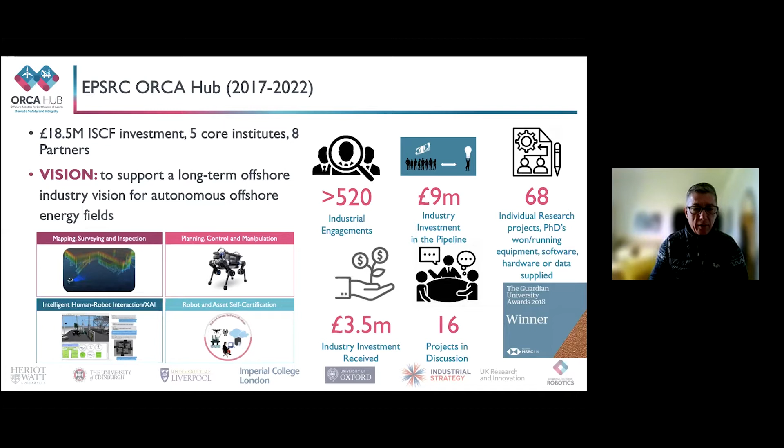The first work package was about mapping, surveying, and inspection, and we looked at 3 domains. The first domain is subsea. In this domain, we've created a new mobile platform that can be integrated into any underwater vehicle, including a stereo camera system, an acoustic DVL, and a gyroscope, enabling us to navigate around structures in poor visibility and build 3D maps of the structure. This is an example of the vehicle working in Blythe, where visibility was very poor.

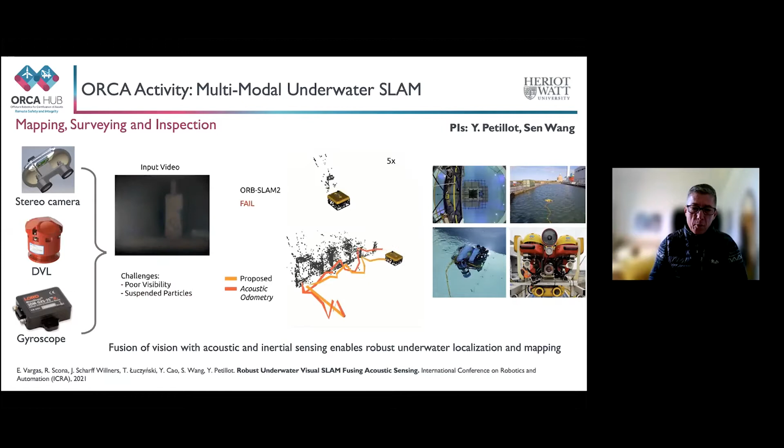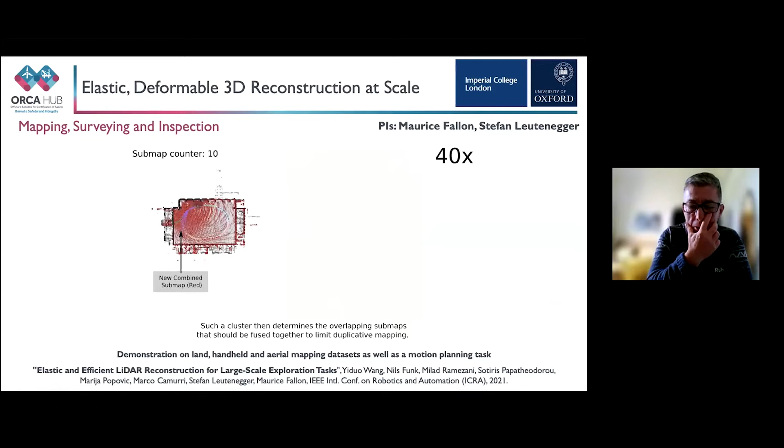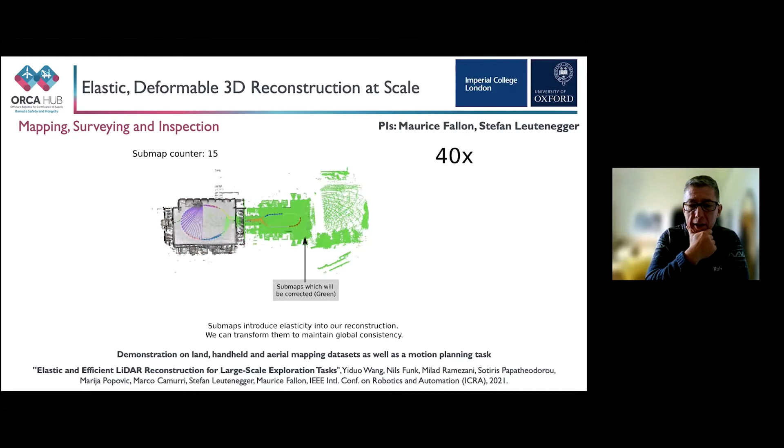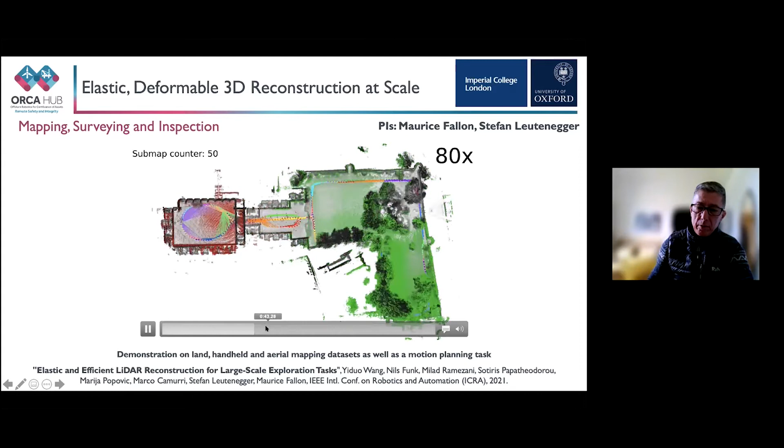We have done similar things in the air and land environments. This work was led by Imperial College and Oxford University. They have developed a payload that can be mounted on any vehicle, enabling effective mapping of the environment. This is an example in Oxford where a ground vehicle is mapping the area, and here's an example of an aerial vehicle mapping an area outside the campus.

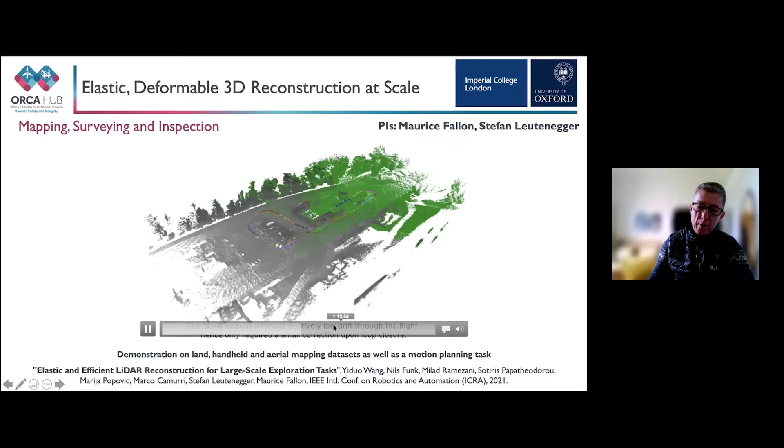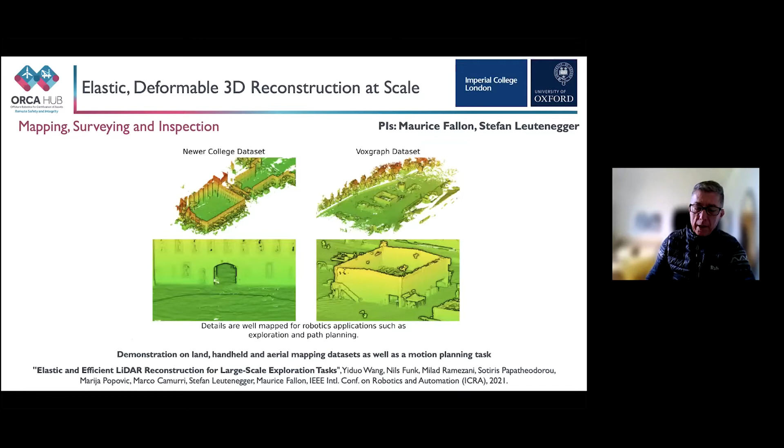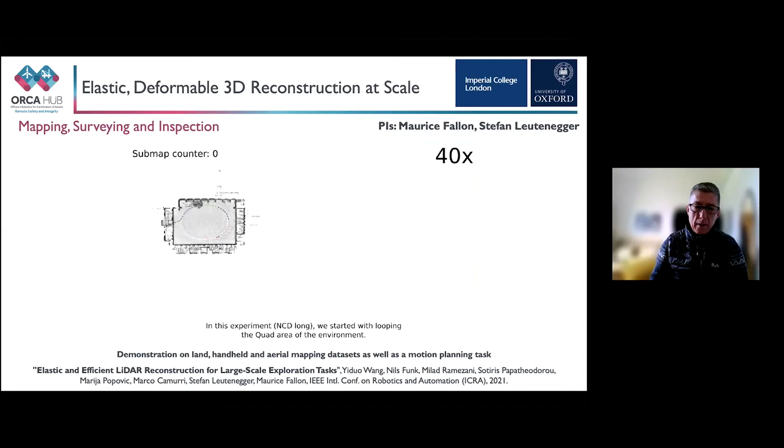With this, we can build really nice models of the environment, and as I said, this can be applied in various settings. This is a ground robot equipped with the same payload. There's also been work done with quadruped robots using a LiDAR-based payload, where we can again build 3D maps of the environment. Here's an example of the system working outside an Oxford college, where you can see the quality of the maps built in real time.

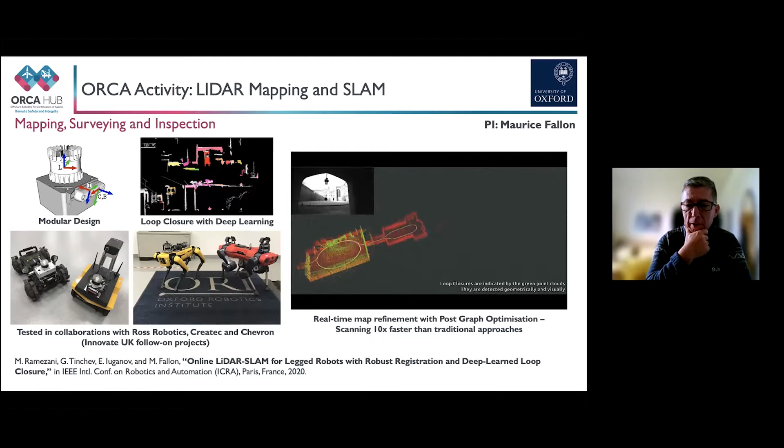I must add that it's not just mapping, we're also doing localization at the same time. So it's a full SLAM system, both in the air, land, and sea, where we can also localize the vehicle very precisely in the environment.

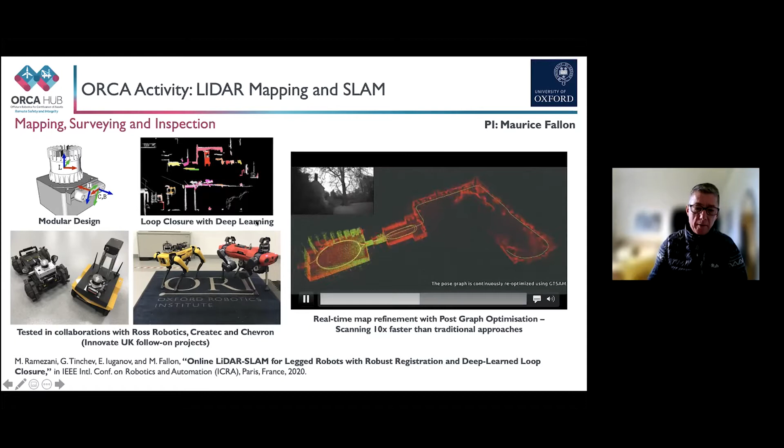The mapping and sensing work package had a second component, which was looking at building new sensors to help with asset certification. One of the sensors built by Imperial College is an NDE sensor based on EMATs, which has since been commercialized as part of a startup. This sensor has been deployed on our land, air, and underwater robots for corrosion monitoring.

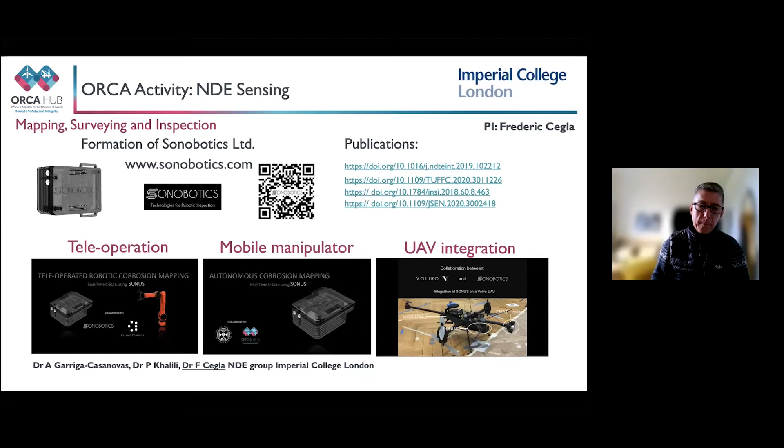The second type of sensor was more focused on IoT. The University of Edinburgh has developed a multi-sensor payload with a very small form factor and very low power, that can be deployed in any environment and measures basic parameters such as movement, temperature, etc. This payload has a multi-communication framework, so you can connect to it through Wi-Fi, Zigbee, serial, etc. We've deployed this on offshore wind farms, underwater, and as part of one of the Stream A challenges to actually demonstrate that at sea.

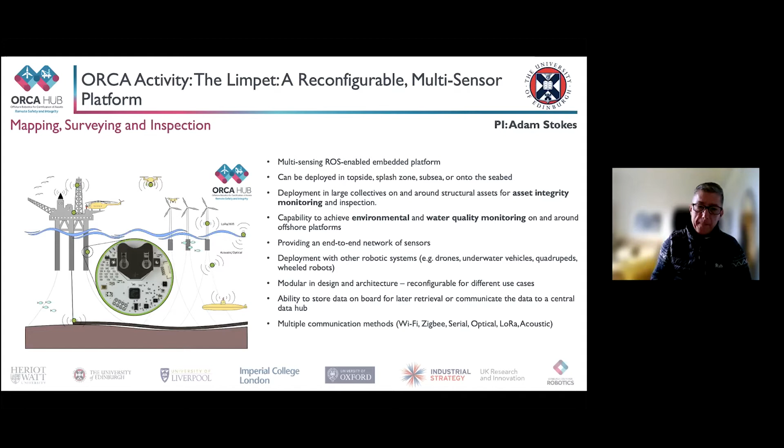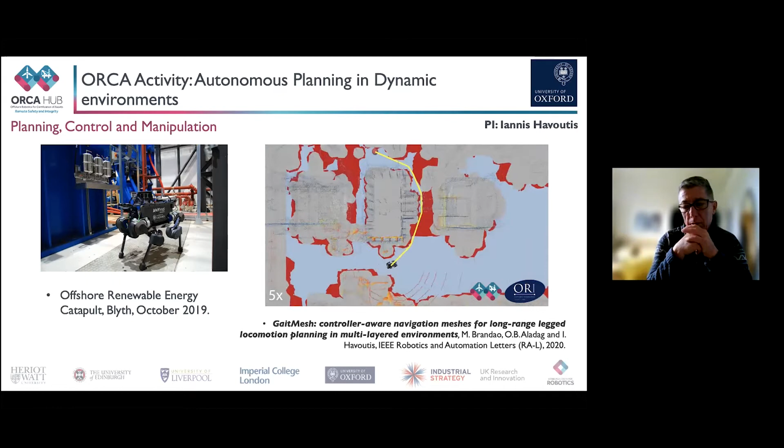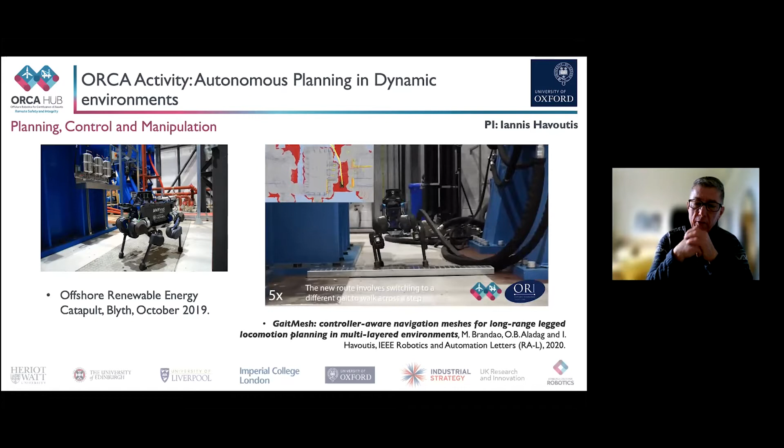Moving on to control and manipulation: we have worked on not just moving around, but also being able to plan motion in complex environments. In the video on the right, the vehicle is moving and identifies that an area is blocked, so it automatically remaps and moves to the right of the image to find the right solution. It can also adapt its gait to the type of environment, so if there are obstacles, the gait is autonomously adapted to make sure the obstacles are tackled safely.

On the planning and manipulation side, we've also been looking at skill-based shared control. What we mean by that is knowing when the operator needs to take control of the manipulation.

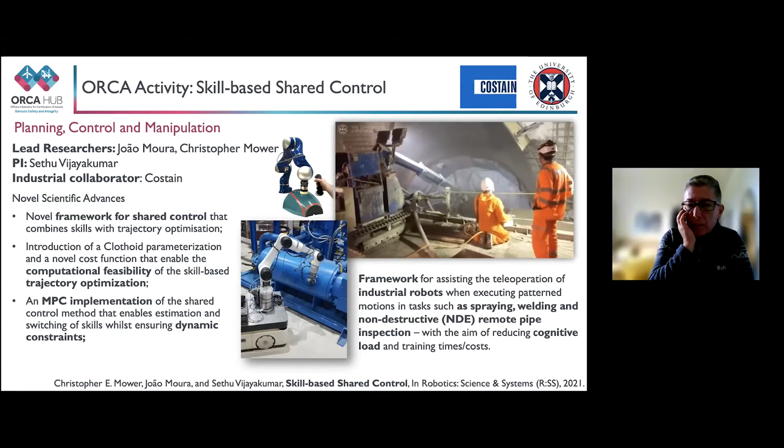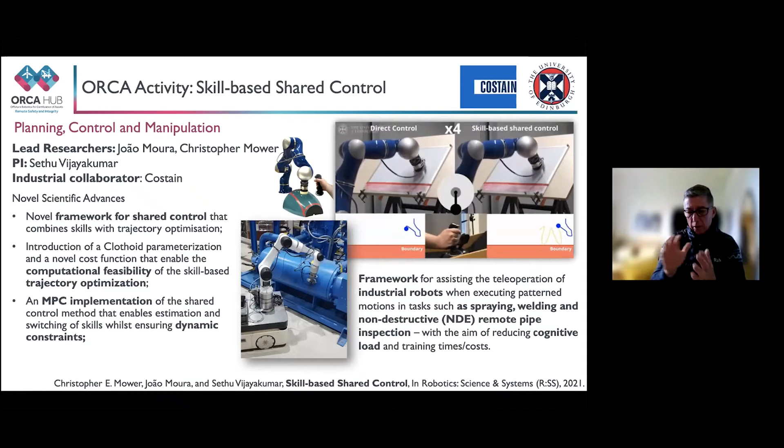So there's an example here, in the construction domain with Costain, where we are looking at cleaning and painting surfaces. Here it's an element where we are cleaning a surface, and you can see the operator using the robot through an interface, but he's got much better control of what's going on. He's not controlling the contact, just the trajectory on the contact.

That's enabled to assist teleoperation when executing complex motion by integrating advanced control into the system.

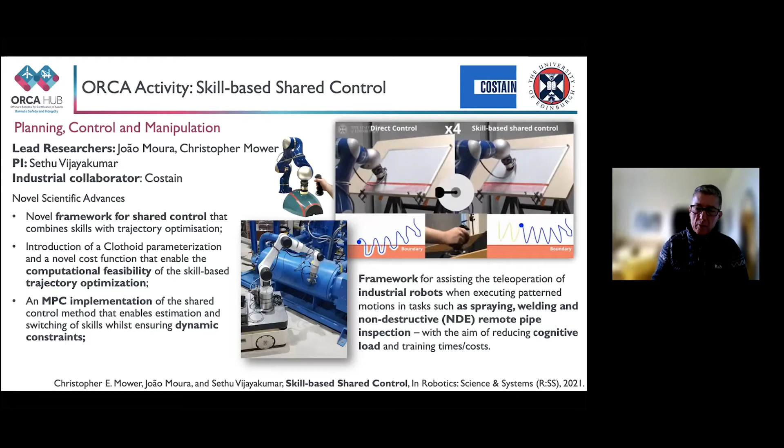Similarly, we've been working on control systems for interactions with mobile platforms, or when acting from a mobile platform onto a fixed world. We've developed interesting control algorithms that enable us to follow a trajectory on a fixed pipe, for instance top left, from a mobile platform. This is very important for underwater applications, where a lot of the manipulation will be done from a floating platform.

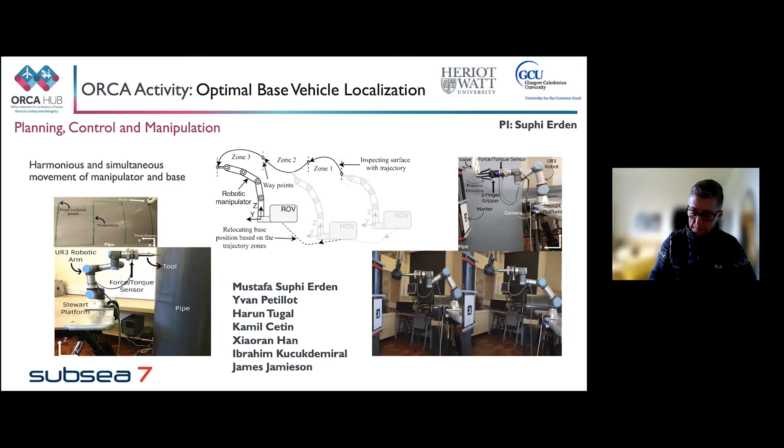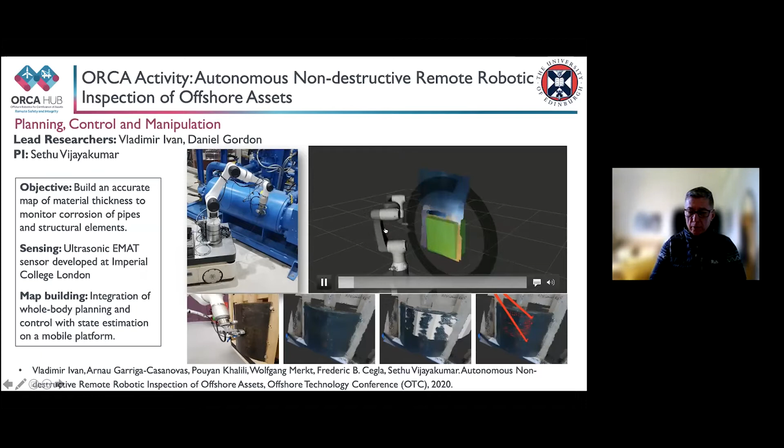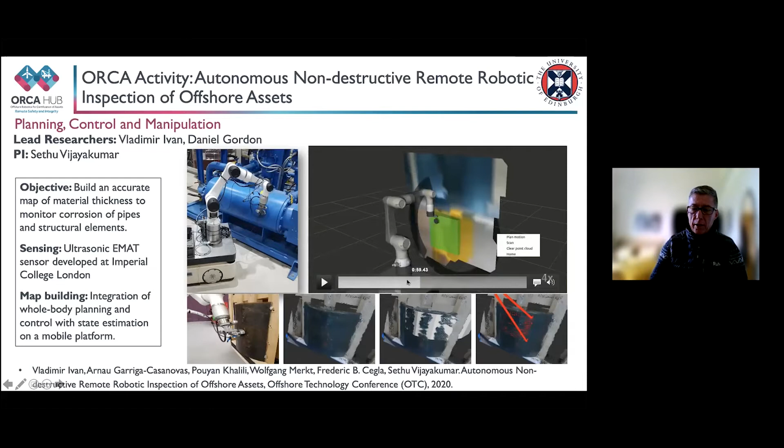More work's been done on the deployment of sensors from mobile manipulators. You can see here an example in simulation where we first scan the environment using a sensor, and the robot is designed to scan the environment. Once the environment has been scanned, we can operate properly with the robot. You can see the robot doing the same thing here, and after the scanning it will perform the full scan of the environment.

This can be done from a platform that is static, but we've now extended it to a platform that is also mobile.

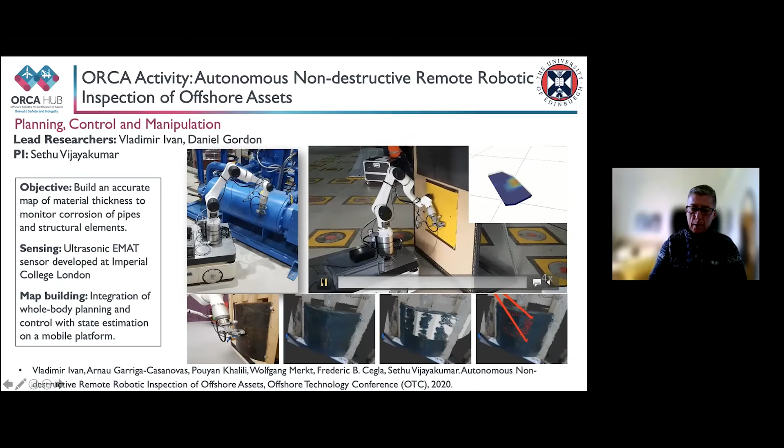On the aerial side, we've done lots of development, and you'll see more videos later during the challenge demonstrations. The group at Imperial College has developed techniques for autonomous perching, which enables you to deploy a sensor and move the aerial vehicle around structures to perform the same type of monitoring we're doing with land and underwater robots. This enables access to places that are really hard to reach, such as turbine blades and very high structures.

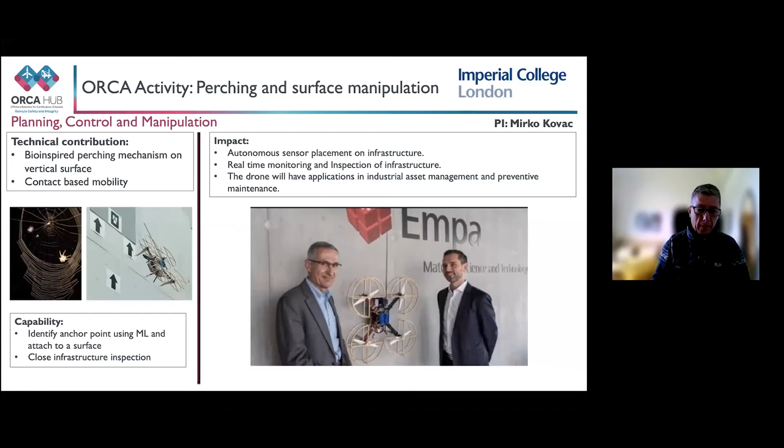I'm moving on now to the third part of work package 3, which looked at interactions. It's great to have robots that work autonomously, but it's equally important to make sure the robot user understands what the robot is doing.

On that front, we've developed an interface called MIRIAM, which enables people to interact with the robot — effectively a chatbot. It enables people to interrogate the robot, ask it to execute specific tasks, and request feedback during the mission. In this case, you can see a robot tasked to do an inspection.

This is a Husky robot. While the robot is operating, we can ask questions about the mission in natural language — for example, when is the mission going to be complete, what are you doing exactly, which task are you tackling. The robot can also report problems and faults, and the human can retask it. This works in both single-robot and multi-robot environments.

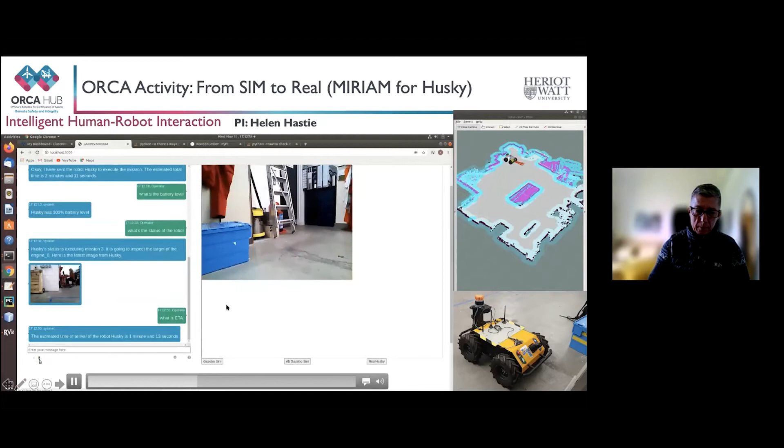On work package 4, we've been working on verification and simulation. We've done a lot of work on robot and asset self-certification, written a number of white papers, participated in standards work, and worked on validating operational envelopes of robots, for instance on flying vehicles.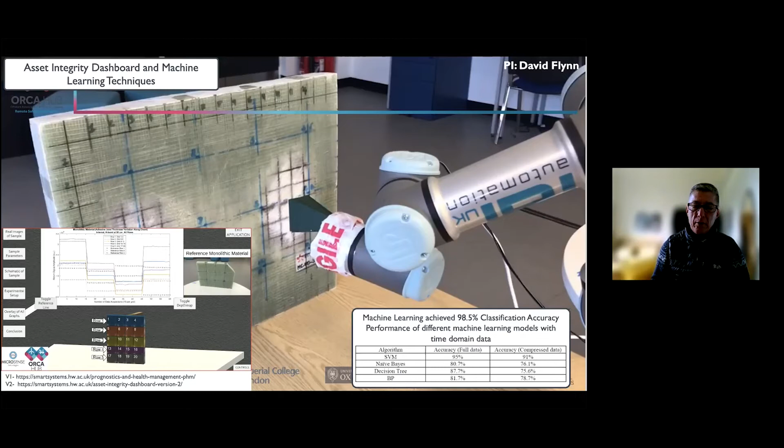That's just a quick subset of some of the applications we've been working on. There was a lot more when I was looking at this presentation, but I couldn't present everything. These are just snippets — there will be more data on the website very shortly, so you can contact us if you want more details.

Finally, we've had nine partner projects developed as part of the ORCA Hub. I couldn't present them all, so we've decided to give you two examples.

One is an underwater communication system, which reaches hundreds of megabits of data rate over about 30 meters. The other is to demonstrate that the driver is following the rules and that the deep learning algorithm is not encroaching on those rules.

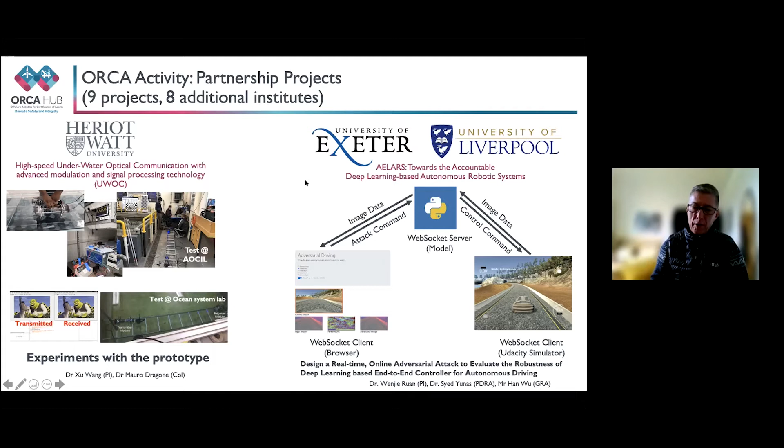So ORCA Phase 2. This is ORCA Phase 1, and I've looked really at a subset of what we've been doing. To summarize ORCA Phase 1, it was really about developing the key technology in mapping, inspection, control, HRI, and certification, so that we could deploy those robots safely in the environment.

ORCA Phase 2 is really looking at three core scientific developments. The first is shared autonomy, because we realized through the project that the industry is not quite ready for full autonomy. So we need to develop techniques that enable the user to be situated, but also to take control from the autonomous systems when needed. We provide autonomy functions which are of value for the industry, but we don't target full autonomy.

We've also realized we need to integrate all the sensors and the robots into a proper cyberphysical system. We look at communication, digital twin, cybersecurity, etc.

And finally, we're looking at resilience. So what happens when things go wrong, and how can we make sure that we don't then need to intervene physically, which would probably reduce the business case for the use of robots.

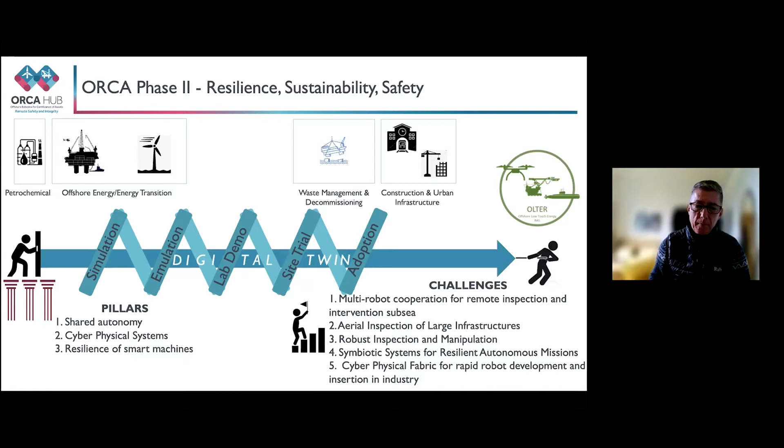In terms of what's going to happen over the next year, the funding of ORCA finishes in March 2022. We have six demonstrations of the existing work, which are on the left-hand side. The new scope, stream B, is the five challenges I've just described. This will happen in parallel, and you can engage in both streams of work. If you feel that you want to be part of this, you can contact us, and we'll explain how to do that in a minute.

This concludes the first part of the presentation. We now have a number of short five-minute presentations on the new scope of the challenges. Dr. Sen Wang is in charge of challenge 1, but he couldn't make it today, so I'm going to present that as well.

What we're looking at in challenge 1 is really to develop multi-robot remote inspection for the subsea. At the moment, we have developed a system that can inspect structures using an ROV. We're working with a number of industrial partners to develop a collaborative system where you have a surface vehicle deploying the ROV around the wind farm, performing the inspection, and then moving to the next wind turbine.

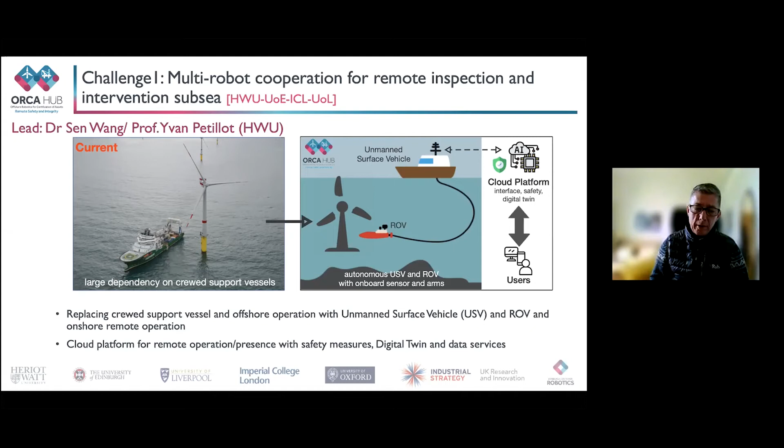This project is ongoing, and I'm very hopeful that we will have a full demonstration by the end of the project. In terms of what we've achieved to date, we've got all the component bits effectively.

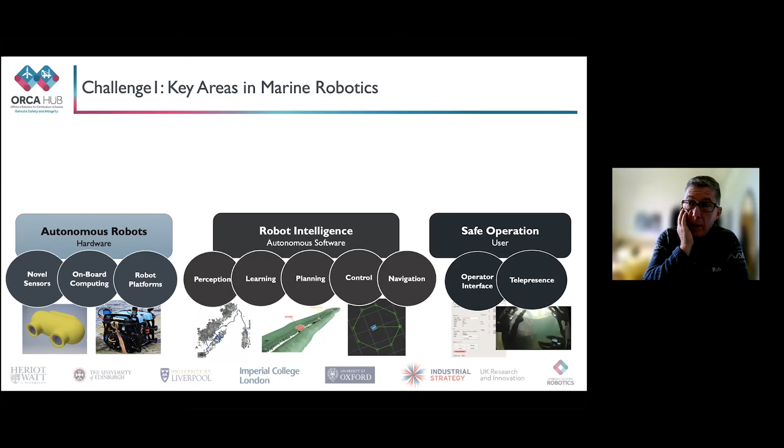We've got autonomous hardware. We've got this portable payload computer that can be deployed on any ROV to do visual inspection and SLAM. We have done some machine learning work that enabled us to build 3D models and detect specific things on data, but we also have the full control and navigation stack. Finally, on the operation interface, on safe operation, we have an operator's interface, and we have developed a telepresence system that will enable ultimately manipulation as well as inspection.

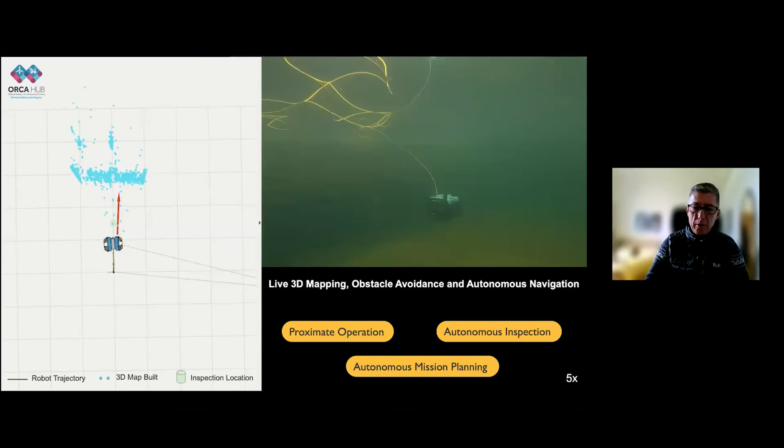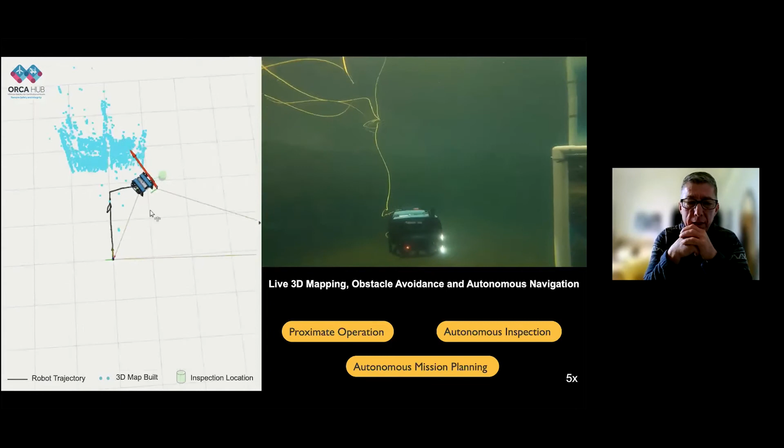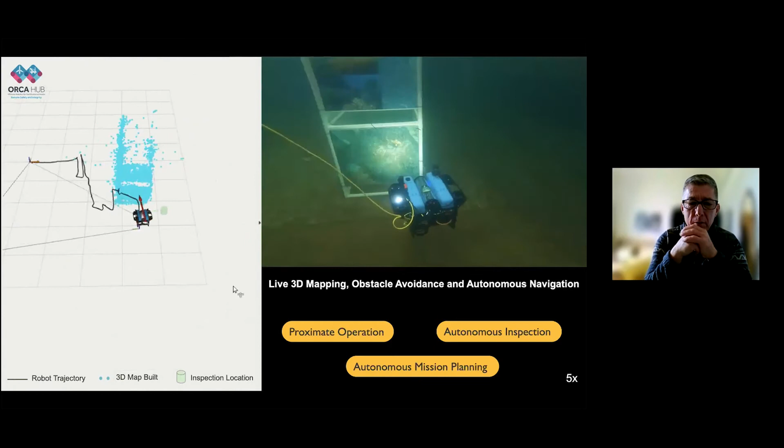Just to give you an example of this, this is a demo in the tank from a couple of weeks ago, where we have the robot inspecting an unknown structure. The robot doesn't know the structure it's inspecting, and it's driving around the structure autonomously in conditions which are reasonably challenging.

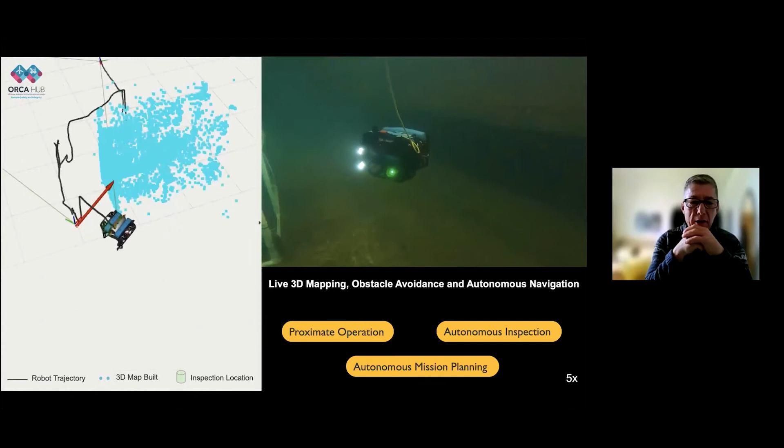What's quite interesting is, as the robot is moving around the structure, we simulate some faults in the vision system so that the robot cannot see for about 15 seconds. You can see that there's an automatic recovery of the system where the robot is able to recover from the failures and keep mapping the whole structure.

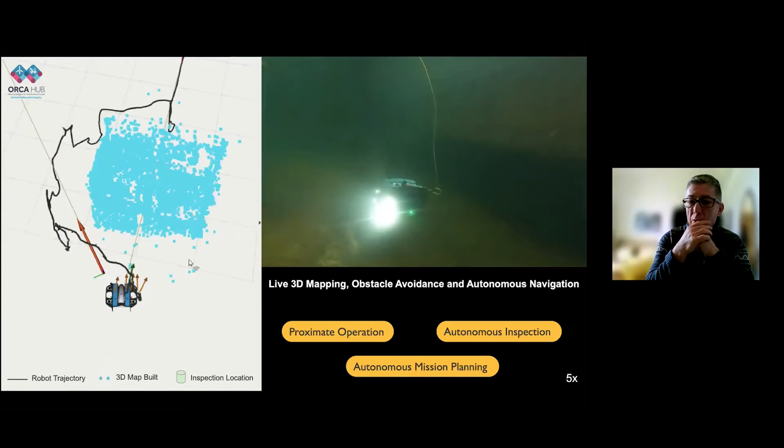So this technique is now ready to go, and we're going to test that offshore in the next months. The next step is to integrate it with a surface vehicle to have a remote, completely remote operation deployment from shore.

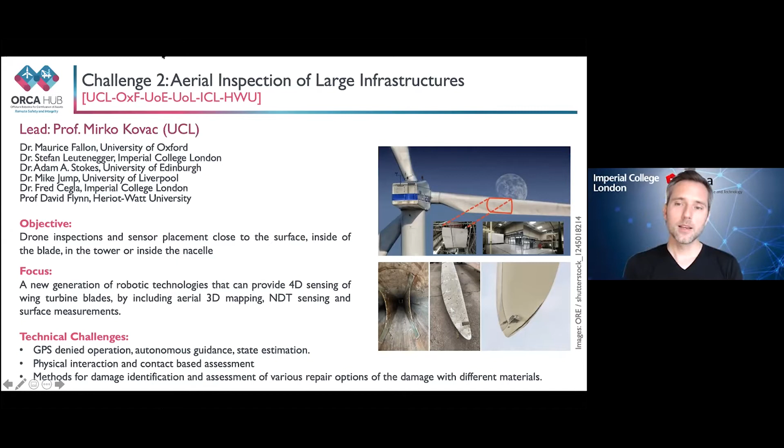So the goal here of Challenge 2 is to look at new methods of aerial inspection of large infrastructures, in particular on wind farms, so wind turbine blades.

Now, drones are already used for wind turbine blade inspection and are basically the de facto standard: flying a drone quickly, taking pictures, identifying damages, and so on. This is cheaper, faster, and lower risk compared to manual methods of inspecting it.

In this challenge, what we focus on is taking the next stage of that, not just doing visual inspection, but 3D mapping, so full high-resolution mapping, and also placing sensors on the surface to get insights into the internals of the blade, and like this be able to predict damages, failure modes, and schedule the operations and maintenance aspects of these blades.

This can reduce the downtime on the facility and save a lot of costs associated with the operation of such wind turbines.

So we do this not just on the surface, on the outside, but also on the insides. If you see here on the right side, you see the insides of a turbine blade, where often the data doesn't exist and these areas are very constrained, so very hard to access with manual means.

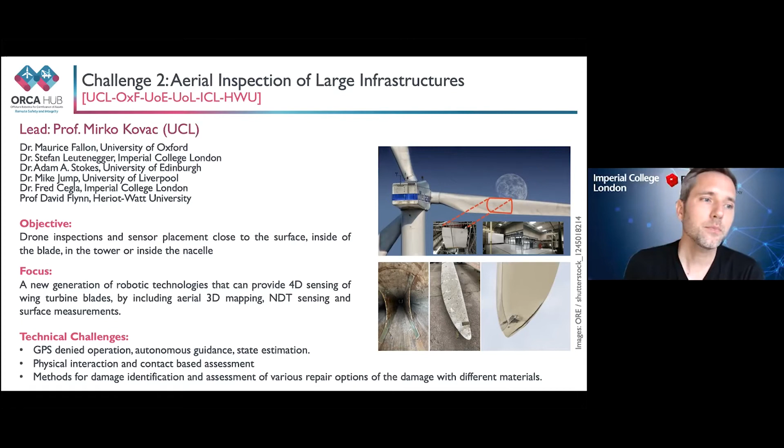The type of sensors that we deploy are twofold. One is the limpet sensor, as you see here on the top picture, which can detect in an IoT type of framework the vibrations and surface features and operations on the surface. This can also be used as a communication relay, for example, for the drones.

The second layer of sensors that we use are the NDE sensors, such as EMAT-based sensors, that can detect corrosion on the surface or the thickness of the material. This can be integrated into these drones to inspect and monitor the behavior and surface features.

So this is one focus: the sensor placement in an autonomous way using those drones.

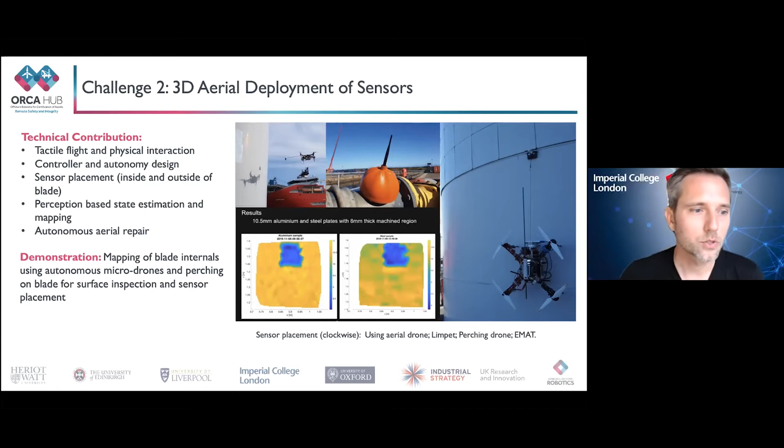Then also we work on the mapping aspect of this. This is work led by Oxford University and Imperial College on high resolution mapping, as you see in the top picture, where drones use LiDAR and vision, tightly fusing them together with the odometry on the platform to get very high resolution images and be able to change the resolution of the maps to get insights into the structural performance and structural changes of the blade.

At the bottom, you see one of our drones that are very lightweight, only 100 grams and very small, so palm sized, with full autonomy. They can avoid obstacles, fly inside the wind turbine blade and do internal mapping, so 3D maps of the internals, and also place sensors and do surface interaction tasks.

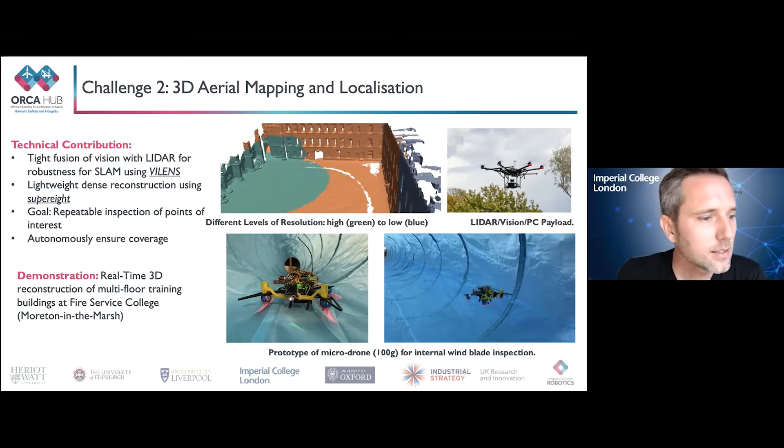We then also weave this data together into a validation framework for the aerial missions. This includes the interaction with the digital twin of the blade and the way of integrating this to get insights into the structural and time-dependent performance and change of the blade, but also linking it to the operations and the digitalization of the operations process to optimize the overall scheduling of maintenance processes.

On the top right, you also see work that we do here in Challenge 2 on wind robustness, having flying robots that would fly around the assets, and a simulation framework that allows this to be operated or optimized, to plan the path in a way that there would be minimal disruption from wind.

So overall, in summary, we focus on new methods of 4D sensing, from structural sensing using 3D mapping to full measurements on the performance and material properties, to fully integrating all this in an autonomous framework to allow this to happen with minimal human intervention and even with remote presence, with those systems being resident on the platform, on the asset, without humans even having to go there to do it. Thank you.

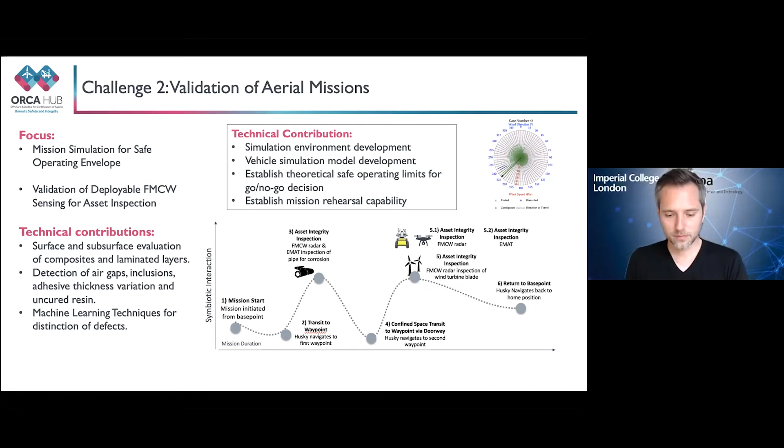Thanks, Mirko. I'm Ioannis Havoutis from the University of Oxford, and I will tell you a little bit more about challenge 3 on robust inspection and manipulation for hazardous environments. I'm leading this challenge together with Professor Sethu Vijayakumar from the Edinburgh University as well.

So in challenge 3, of course, we build on our strengths from phase A, and we further develop work on inspection manipulation. Some of you hopefully have seen our work in person at our demonstrator a couple of years back at the Offshore Renewable Energy Catapult in Blyth, and hopefully have an idea about what we've been working towards in the ORCA Phase 1. So there you have seen a bit of our automated inspection work and our initial approach to manipulation.

Now in stream B, we're really dialing this up to 11. We're working navigation for real world facility clutter, and we're bringing in quadrupeds with manipulator loads. So we're working towards more inspection and intervention capabilities. And we're going to start with automated monitoring of dials, valves, thermal images, and so on. And then range all the way to non-destructive evaluation scans and anomaly detection. And of course, on the manipulation front, we'll be working towards automatic turning on valves, pressing buttons, and so on. And on the more extreme side of our manipulation vision is to do more extreme intervention like cutting and dismantling for waste handling and decommissioning.

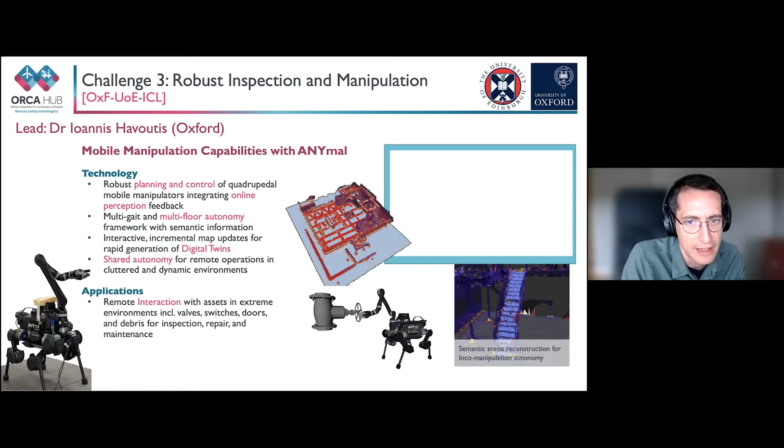In the next slide, you can see here sketches about what we're putting together for loco-manipulation tasks. So these are tasks that are relevant to energy facilities and so on. The robot can then robustly turn valves, open doors, operate switches, navigate routes with obstacles and doors and so on. And this is in a completely automated fashion. So the robot can either be teleoperated with a really simplistic user interface for the operator to perform these particular skills, or autonomously complete these tasks.

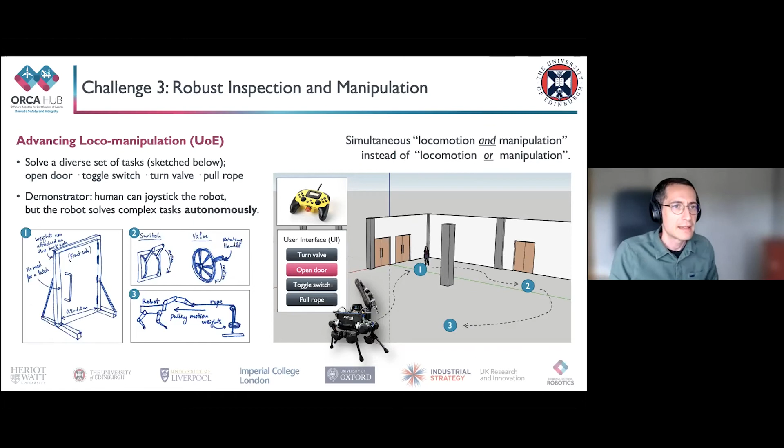Okay, so in parallel, we're working to further develop our non-destructive evaluation scanning capabilities. We've shown in the past how we can autonomously scan for corrosion, as an example on the videos on the right there. And in the middle, this is more recent work on how we can extend this to even more complex surfaces, more complex geometries. And then, of course, part of our work will be to integrate it with loco-manipulation on our quadrupeds.

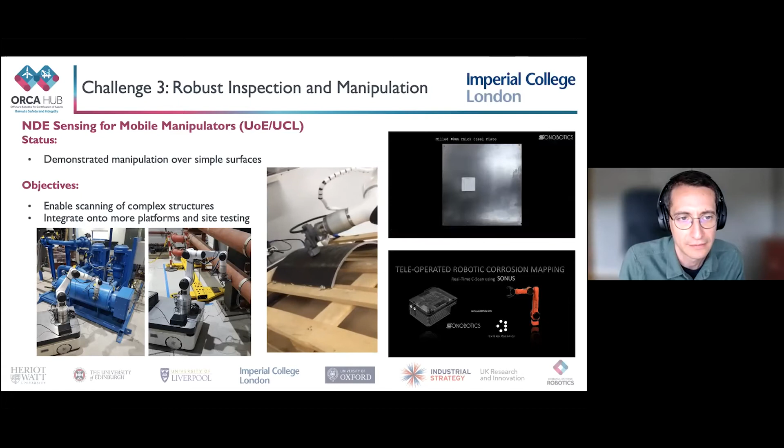So this is the other end of the manipulation spectrum. We're developing autonomous capabilities for robotized gas cutters. Initially, this will have the form of a gas cutting facility mockup, so with larger manipulator arms. But we're also will be working towards integrating that into mobile manipulators in view to have robotic decommissioning for ship hulls and more large material structures and irregular geometries.

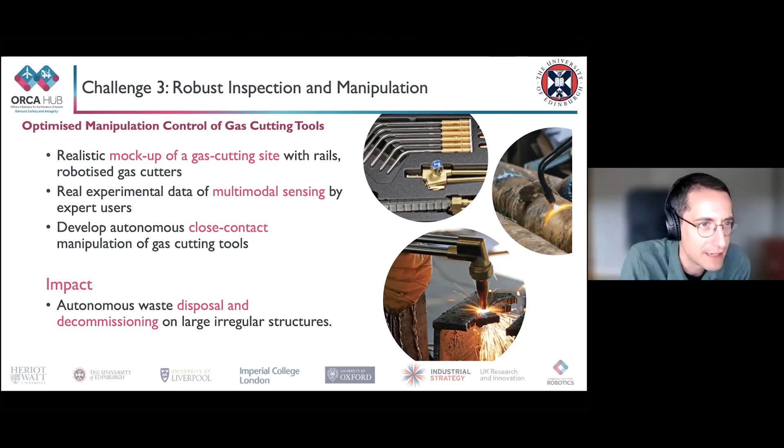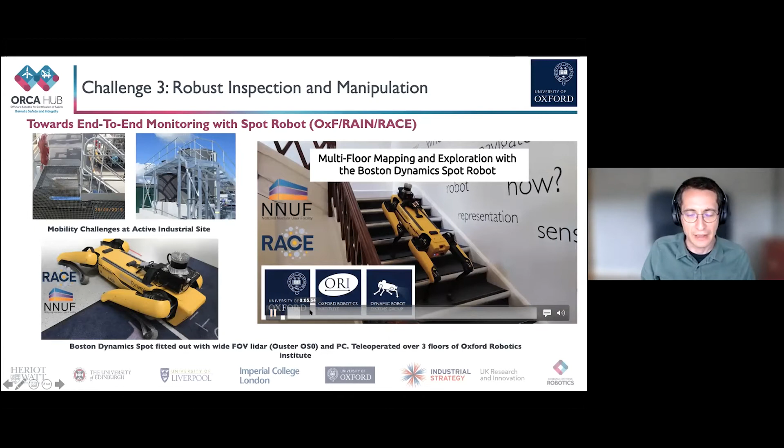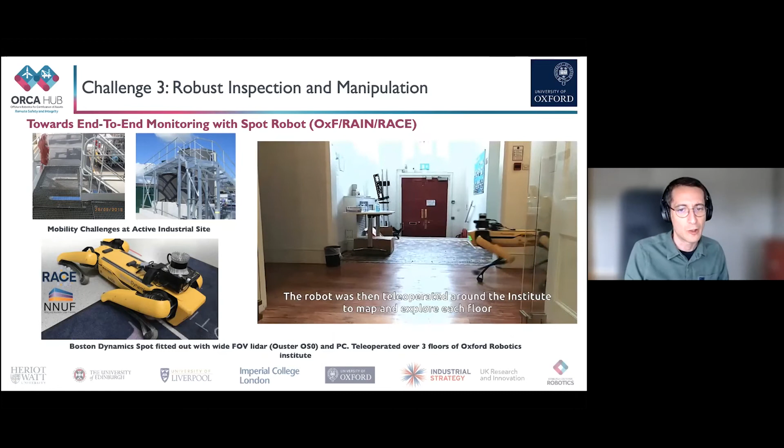And finally, on the next slide, by popular demand, we're expanding our platforms to include the Spot Robot platform from Boston Dynamics. And if you can also play the video on the right, even. So we will be incorporating the inspection payload that we've developed on the Spot robots, and we will extend its capabilities with a learning support anomaly detection pipeline, for example, that can identify corrosion, structural damage, spurious heat signatures around the facility, and log such data precisely, and integrate them to the digital twin representation of the facility.

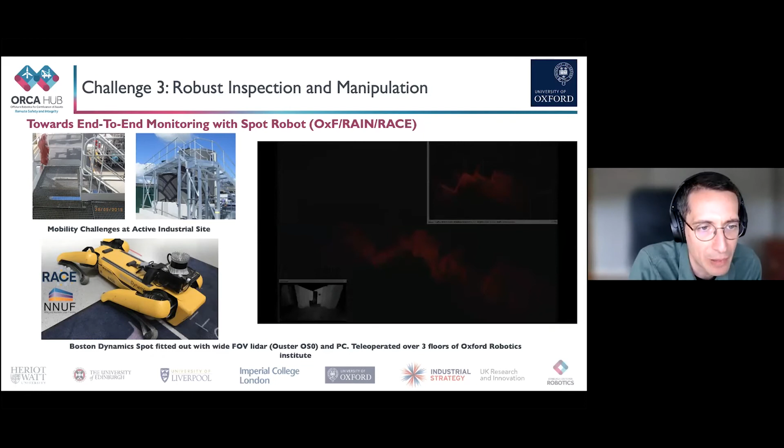So here's just an example of our ongoing work on multi-floor mapping. This is actually at our lab in Oxford, going through our lab and our office space in the Oxford Robotics Institute. And that concludes the overview of Challenge 3.

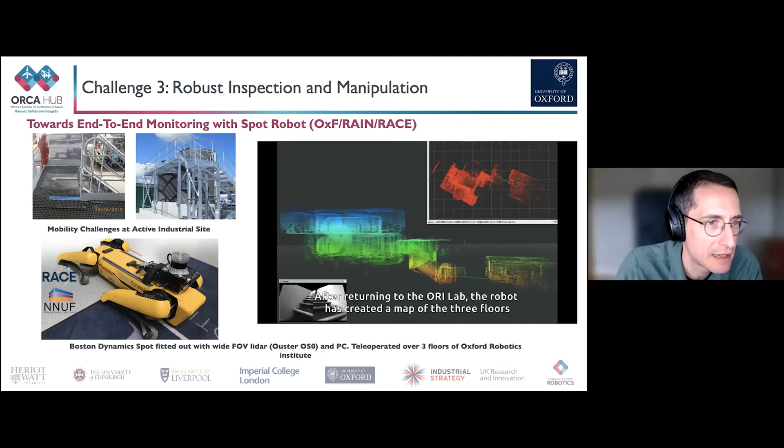Thank you, Ivan. So in Challenge 4, building on the successes we had in Stream A, where we created the world's first subsea cable asset management and planning system with in situ inspection with low frequency sonar and robotics. And similarly on the top side, on the surface side of things, we achieved a lot in asset certification for wind turbines, robots and blades.

This time, we really want to focus on these barriers which are stopping companies upscale and fully lock into the value proposition of multi-robot fleets. We're focused on giving you a transferable toolbox which allows you to address safety, reliability, and resilience. This is timely given the growth trajectory in offshore robotics per the government's 10-point plan, and we need to deal with pragmatic challenges these off-the-shelf systems face. We're treating multi-robot systems as part of that digital fabric, focusing on collaboration and cooperation between robots, infrastructure, and people.

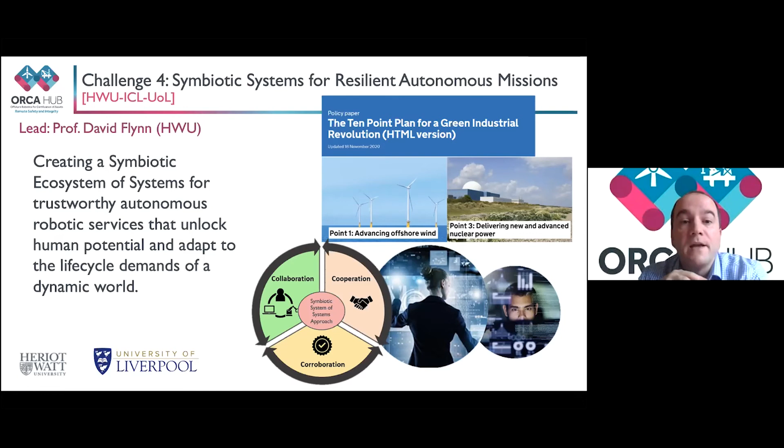For our demonstrator, we have a confined space mission environment. It's an asset integrity mission that is beyond visual line of sight. We will have multi-robot systems, a ground-based Husky and 3 aerial systems deployed, and we're going to use the symbiotic digital architecture we've developed to coordinate these systems in situ.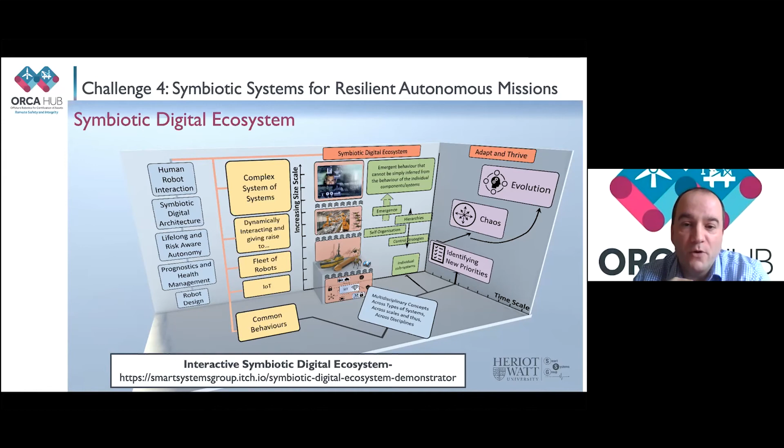Our symbiotic digital architecture can include, in real-time synchronized fashion, about 1,000 different embedded systems, covering infrastructure monitoring as well as in situ robots. We're going to use this environment to capture safety, reliability, and resilience issues, then develop methodologies for them. We're also making the brave, or perhaps foolish, decision to hand over control of the mission scenario to our industrial collaborators in order to verify and validate the strategies we deploy in this environment.

Our focus here is how to address the issues of the dynamic environment. These systems have certain thresholds of reliability and lifetime, and we've developed reliability ontologies that operate at the front end, or edge, of these systems. Thanks to the digital architecture, we can synchronize these systems and their digital models into one space, where we can mitigate risks around safety, compliance, resilience, and reliability.

You can imagine a scenario where we have a forecasted fault in one of the robotic platforms - how can in situ systems help mitigate this, deliver spares, etc. Looking to the future, we want to give you this digital architecture so that your specific requirements, safety case, operational needs, and robotic platforms can be rapidly deployed and scaled with the assistance of this digital enabler.

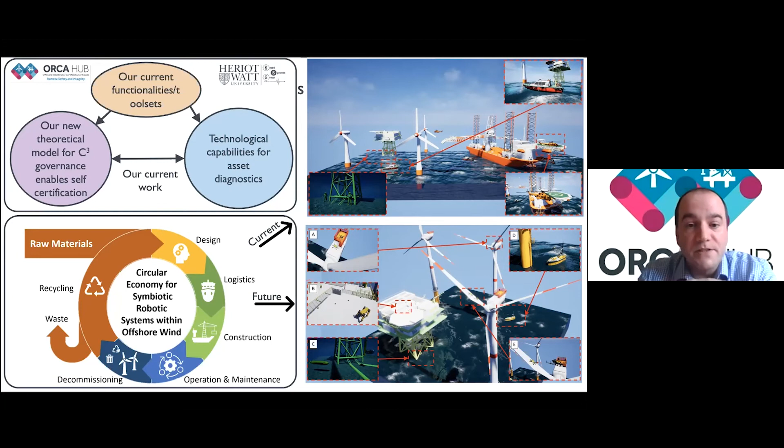Unlike my colleagues, I've not used videos, but there's an excellent link to the work we've done with Clearpath, in our deployment at Blyth, where we demonstrated bi-directional collaboration with the human-in-the-loop partner, working with the digital environment that represents the field systems in real time. In that video, you'll see how we've started to address challenges like unplanned threats to the safety case, such as a person unintentionally entering a mission space, or an unknown fault emerging in the system.

What you'll see in this video is how we take complex front-end analysis and deliver it in an engaging format for a non-expert to understand. You'll see that we can support a remote digital teardown, so to speak, of each individual system deployed in situ, so the human can not only collaborate with, but also query and reassure themselves on the state of health of the systems in situ.

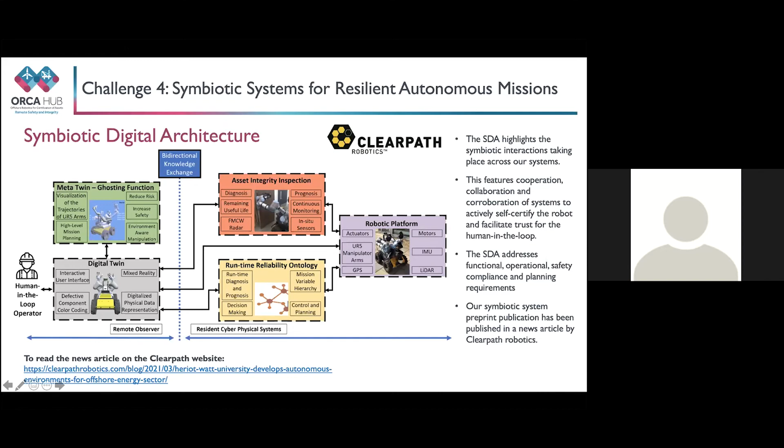This last challenge is an interesting one. What we've had so far is 4 different use cases representing different challenges within the ORCA Hub. This last one is a cross-cutting challenge that goes across all 4 of the things you've seen previously. The idea is that we're looking at this so-called cyber-physical fabric - all of the middleware that goes between the digital twin and the hardware. Some of the discussion we want to have is about development and test of systems.

So you think about typical systems development. You go through design, build, test, into simulate, into living lab, and then you have this learn loop that you come back on. One of the roles for simulation here is about speeding up development.

It's about providing robustness and resilience. It's about looking at how we collect data for doing offline learning, how we enable online teleoperation. And there's all sorts of things to do with distributed development. As we've seen during the pandemic, there's interesting challenges in how you get people to design, build and test robotic systems in semi-realistic environments, or do teleoperations in real living lab environments when people can't physically be there. How do you do that?

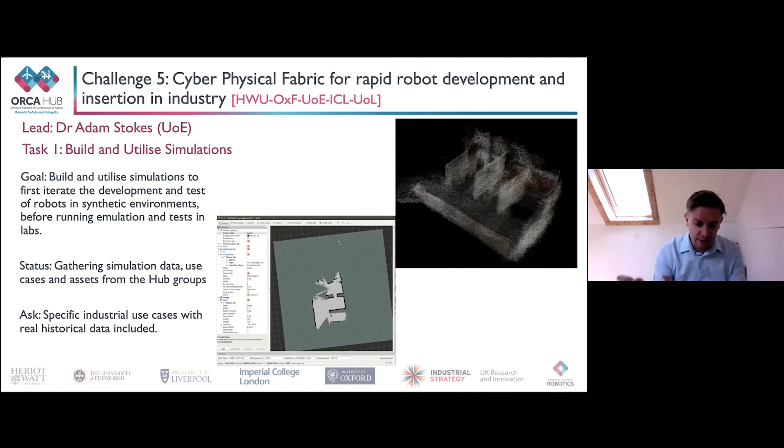So there's a whole discussion we're going to look at here. Some of the idea with this cyber-physical fabric is to think about how we can define standards, how we can think about middleware, and how we can think about having shared open data standards that the robotics community can buy into. At the moment, lots of things are stovepiped, or sit within companies, which means there's a lot of replication of effort that goes into the standard elements that feed into a robotic system.

Taking information in, looking at point clouds, looking at how you resolve that out against a digital twin, and how you communicate down through middleware onto your robotic systems. There's an interesting discussion to be had about standards and about how you could develop a national fabric that everybody can buy into, in the same way as you see with things like Linux, where people share information because it benefits everybody as a whole.

But within that, there's interesting opportunities for new business models. For example, the buying and sharing of individual blocks, which are your secret sauce. You don't deliver, you don't tell people what's in those blocks, but you can buy and sell and share those in different ways of operating. So, Ivan, if you go to the next slide.

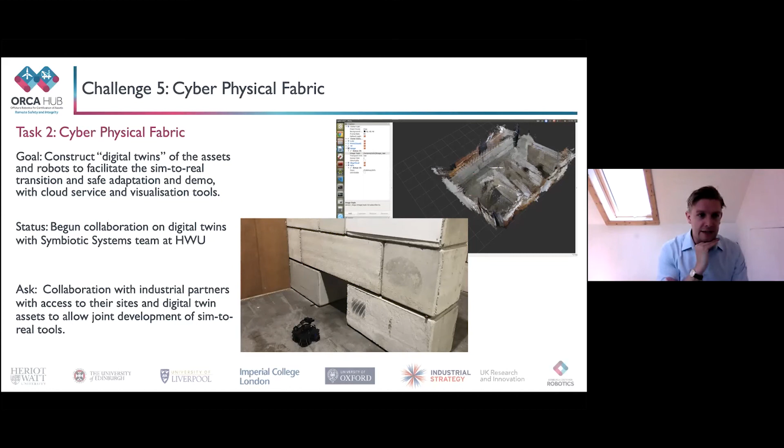An example of this is things like universal connectors. This is one of the key pieces of work that I'm keen to push in this challenge. If you think about the ways robots interface with other systems, for example for getting power or getting data, we have things like 3-pin plugs and USB, which are well-defined standards developed for specific use cases. It's an interesting thing in robotics that each robot has its own specific way of interfacing with charging. It might interface with data in a particular way, but there's no universal standards with this.

Universal open standards will open up all sorts of interesting opportunities for collaboration between companies and for ways in which you can do things like the co-design of novel robotic systems with new pieces of infrastructure. So if we take one of the narratives we've been looking at in ORCA, which is about resident systems, fast forward 10, 15 years in the future, are robots going to be involved in the operations, maintenance, inspection, repair of public infrastructure?

I think everyone would agree the answer is yes. So some of this is about looking at connectors that will provide mechanical connection, power connection, data connections, as a way of facilitating that conversation about standards and modularity.

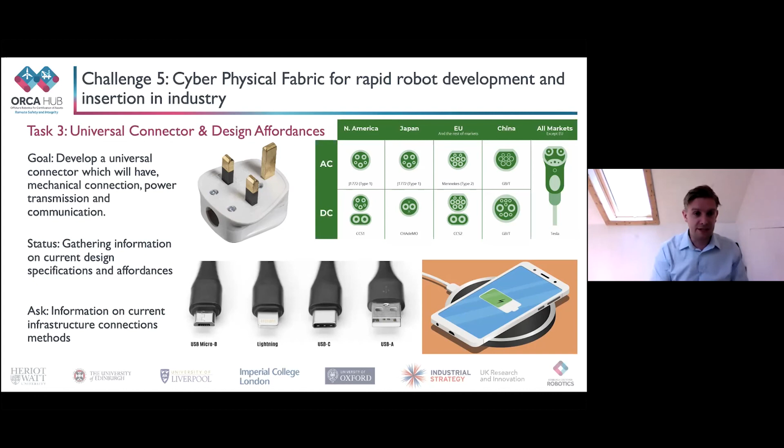If we go to the last slide, Ivan, one of the things we're going to do within this current phase of the ORCA Hub is to look at modularity, to look at how we can embed some of these universal connectors with design affordances to facilitate this conversation about general purpose robots and modules and how people work with one another when they work remotely.

So the idea with this specific task is to look at how you would design a new type of robot system where everything is going to be done remotely. People are going to be collaborating using this digital fabric to develop a system that's well designed to a number of different standards that then feeds into best practice for middleware and for how this sim-to-real gap can be built up. And the end point of this will be something which interfaces back with a connector.

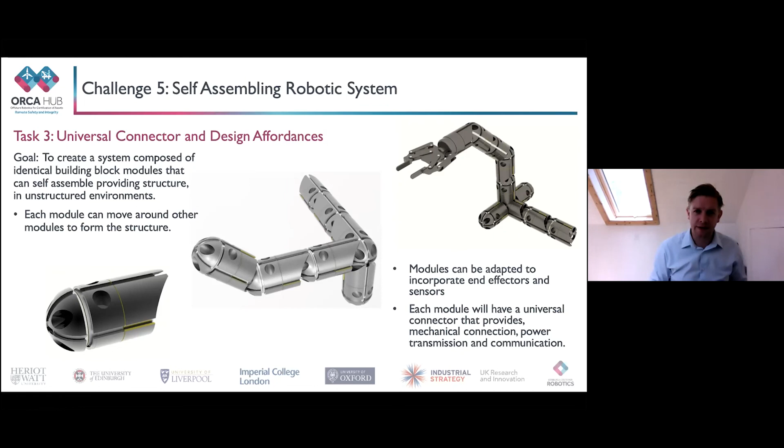And this builds on lots of work we've been doing recently with some of our industrial partners who look at industrial robots, who look at general purpose robots, and who look at modularity. Just trying to facilitate that discussion of, within the ORCA Hub, we essentially have a small version of the overall macro system. So let's have a look at how we can think about best practice within this specific task. That's where we're up to with challenge 5.